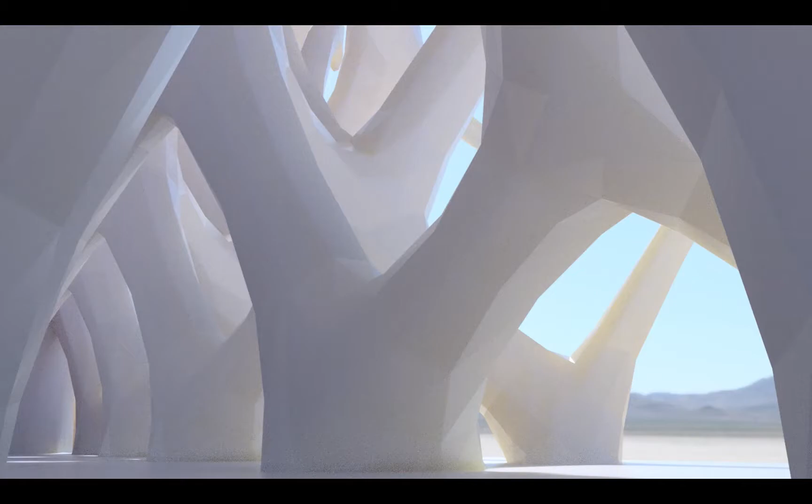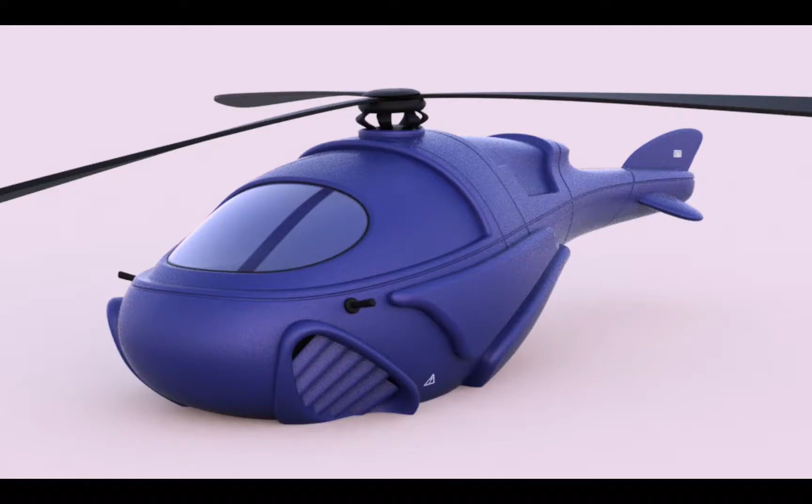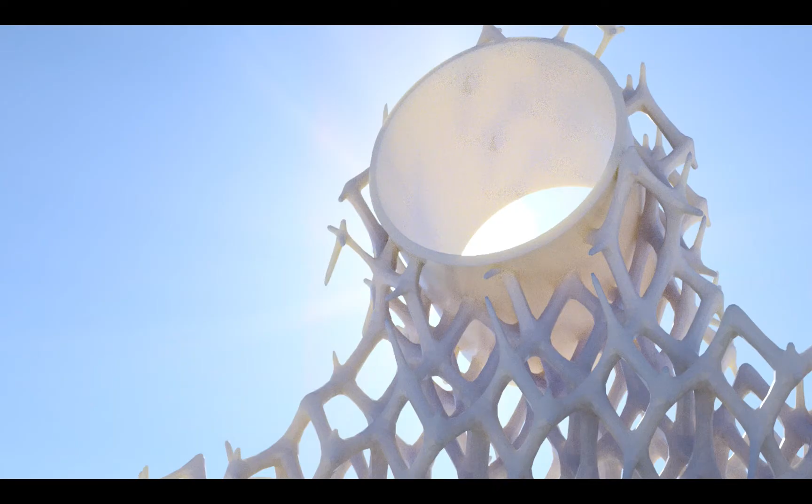Taking a look at what we're going to cover in the class overall, we're going to model sculpted designs, things like furniture, helicopters, mice, flying things, flashlights, furniture of all sorts, go-karts, consumer products, and even a car. We will also take a look at lattice structures, finite element analysis, and part optimization.

For this class, we will use Autodesk Fusion 360. The cloud-based infrastructure of Fusion 360 lets me work collaboratively with others. I can even go so far as to share my work out with the world here on the Fusion 360 gallery.

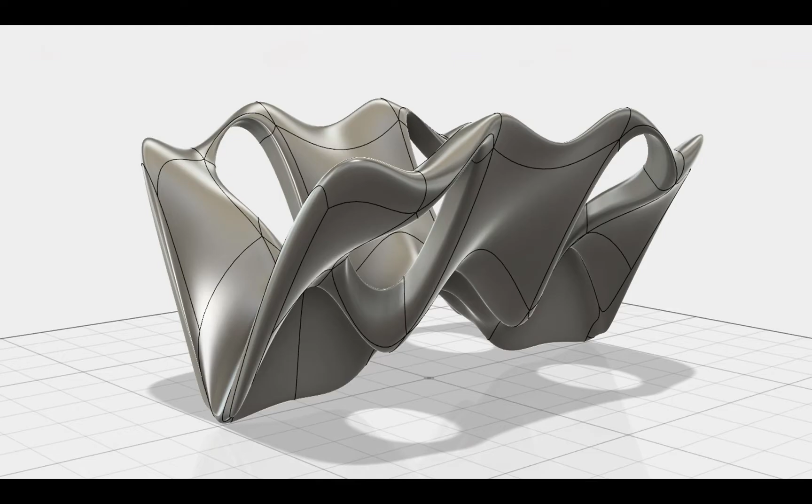This project, for instance, I've created here is a sculpted form. I created this form, then I created this rendering and shared it out. I heard back from a colleague in Germany who saw what I was working on and wanted to test 3D printing with wood fibers, and he sent me back this image.

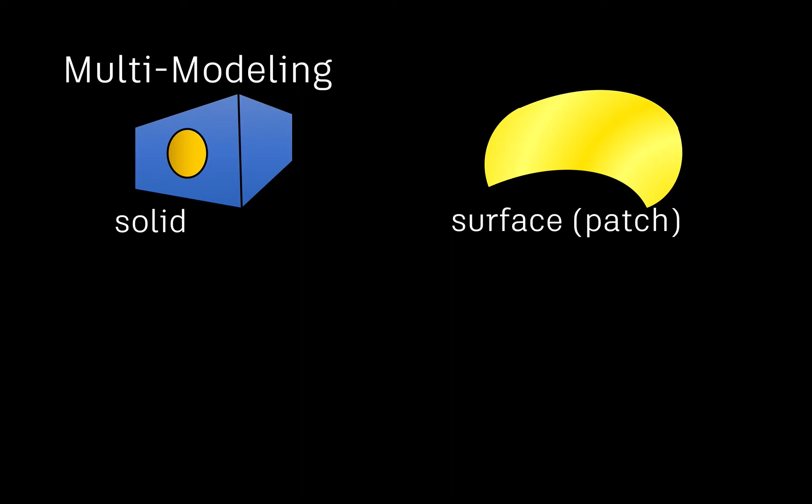Fusion 360 harnesses multiple modeling techniques so that we can use various techniques to create a model. For example, Fusion 360 has solid parametric modeling, surface patch modeling. It allows us to use reality scan captured data like mesh, and also use T-spline sculpting tools.

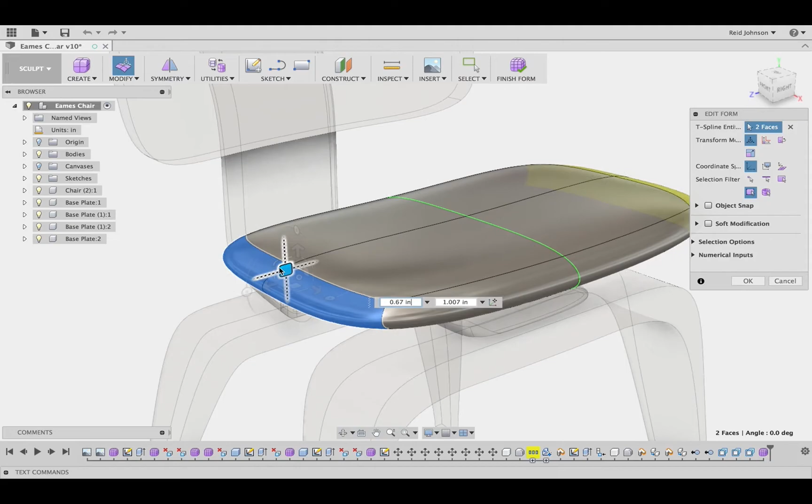For example, in this chair model, I'm currently using a sculpted body to create the seat. This is a very ergonomic form that I can push and pull to create the perfect seat shape. The cool part is I'm using this sculpted body, but I'm also using parametric modeling features to create the perfect seat. For instance, here I'm adding a fillet on the edge.

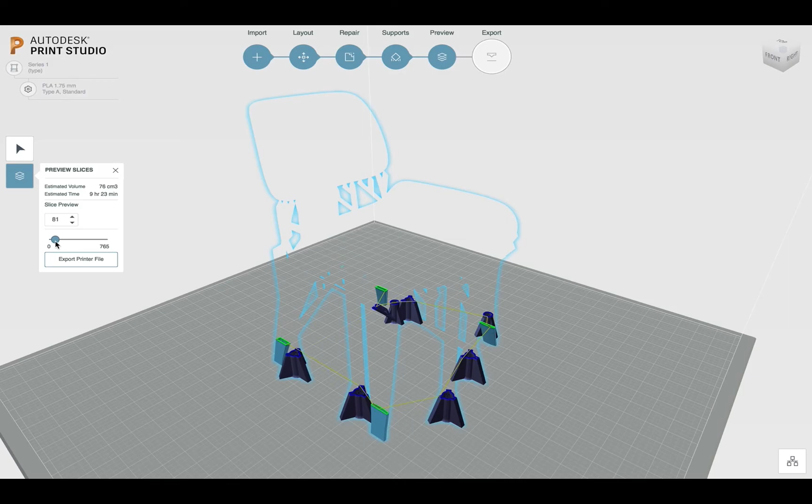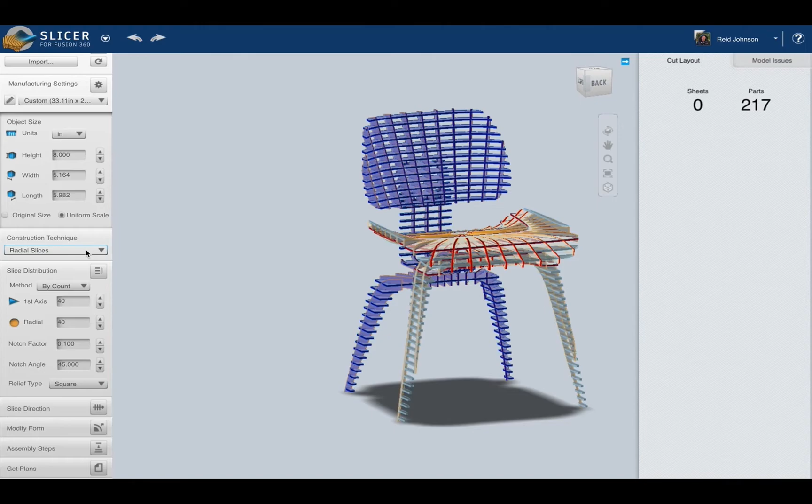Fusion 360 also lets us go directly from our digital model to physical prototypes using digital fabrication. With Fusion 360, we can also harness existing online data such as the McMaster Carr library to enhance our models. In addition to 3D printing, we can also use Fusion 360 to harness other manufacturing techniques such as laser cutting.

Here I'm taking the chair model and dividing it up into interlocking slices. Fusion 360 also includes tools for CNC machining.

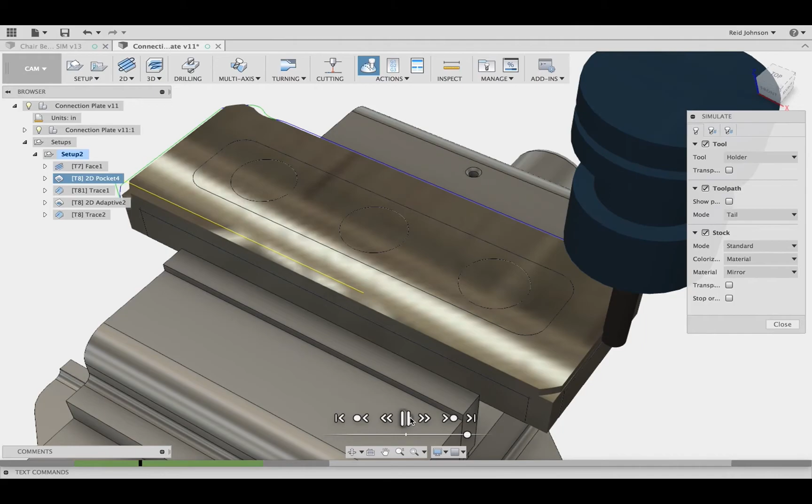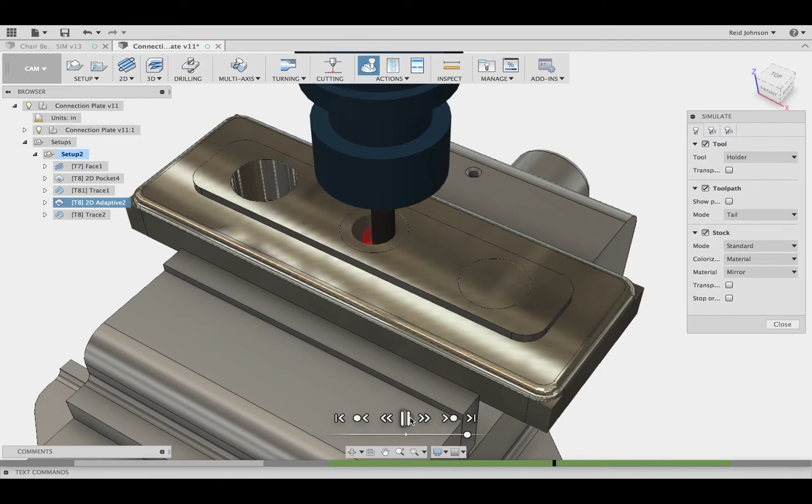This is a connector component portion of the chair. You can see here I'm generating tool paths that will drive a CNC mill to cut the part from solid stock material. After generating these tool paths, I can generate G-code that will be processed by a CNC machine to create the physical part.